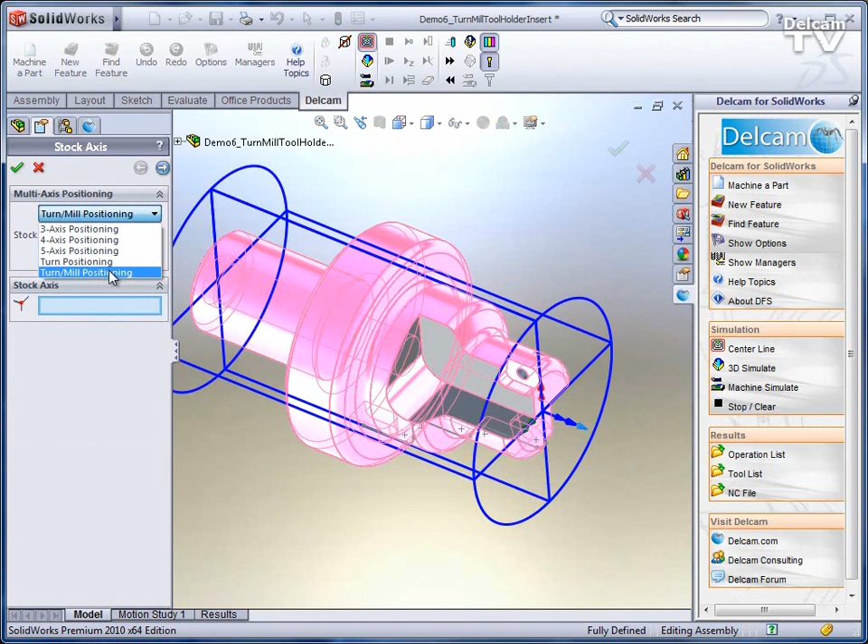And if you look at my stock, you can see that I have a stock axis here on the end of a part, and that my stock is a bounding cylinder. You'll also notice that I have turn mill positioning turned on. Once that is all set up and ready to go, it's really quite easy to program this part.

I'll start with the turning feature, and you can see I already have a sketch down here extracted from the part's original revolved boundary. So I'll go to New Feature. You'll notice that I have a milling and a turning tab. I'll select Turning, Turn or Bore.

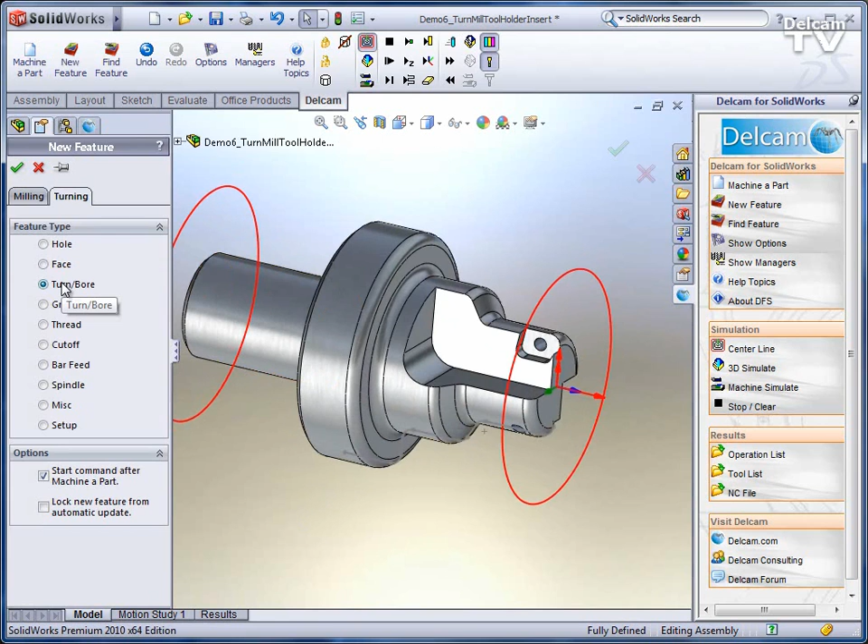And I'll grab that profile right there, and you can see an immediate preview of what that feature is going to look like. If this had grooves that I wanted to machine separately, I could remove the grooves, but that's exactly what I want, so I'll hit OK.

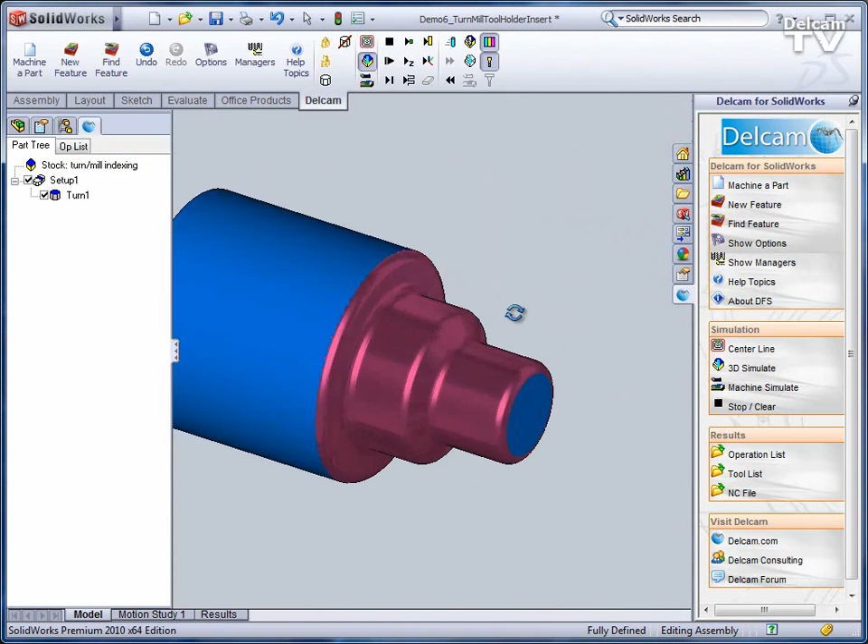Being feature-based, all of my tooling will be selected for me: speeds and feeds, step overs, everything I need to create this toolpath. So there's my original shape and my first turning feature.

Now I want to attack some of these milling features, and it's just a matter of going to New Feature, deciding what type I want. In this case it's milling, and I'll mill this with the side feature, this boundary right here. Instead of selecting a sketch, I'm going to select edges. I can do either one.

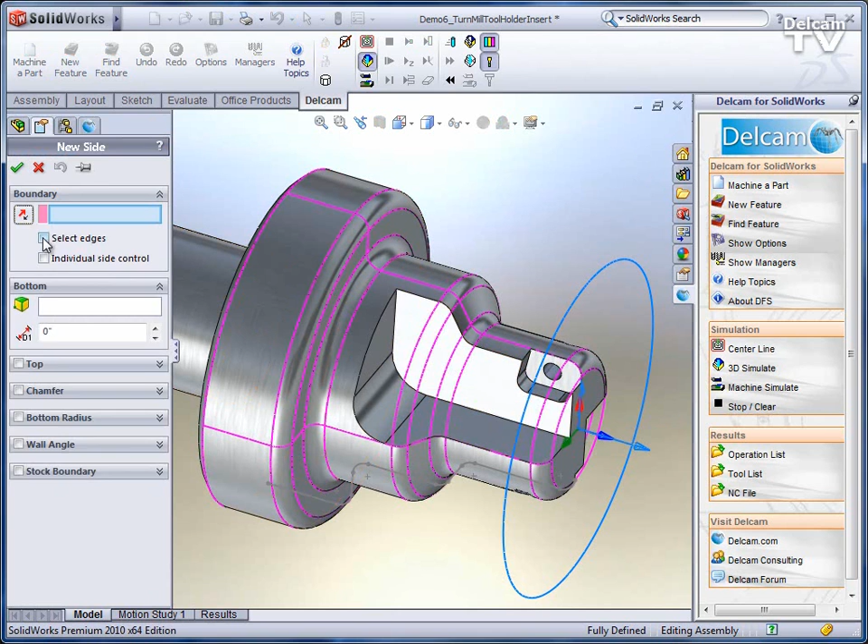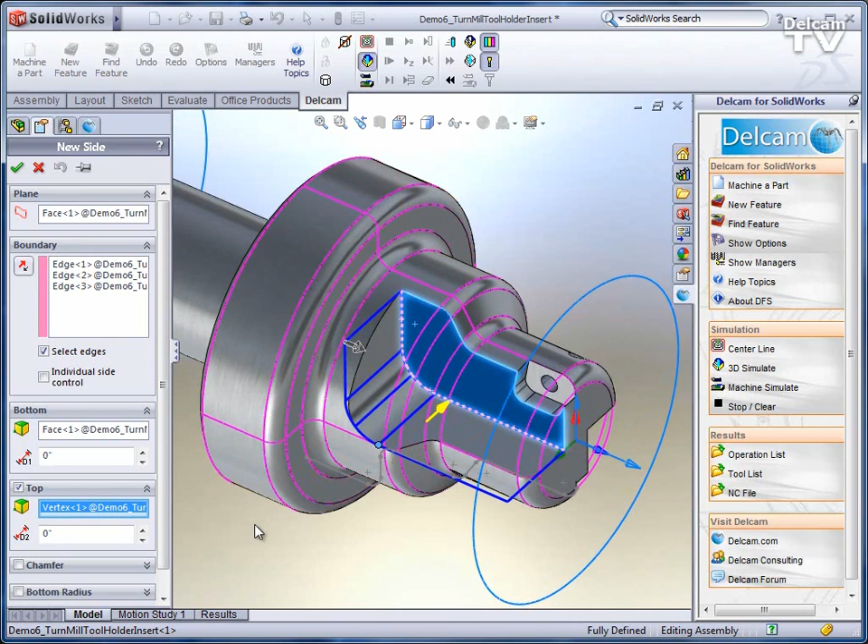I'll select that as my plane, these three edges as my boundary. The bottom will be that face, and the top will be this vertex up here. And you can see that preview ready to go. The yellow arrow, as always, indicates the machining direction, so the tool will be coming from the proper direction. And I hit OK.

And my simulation shows the part machined exactly the way I want it. I didn't have to create another setup for the milling. It just took the geometric information and created the toolpath from the proper direction.

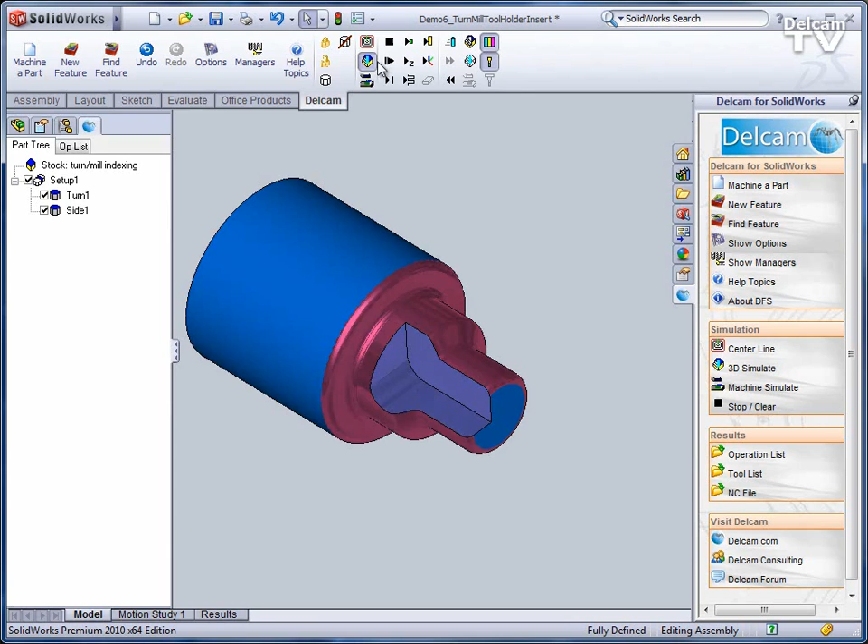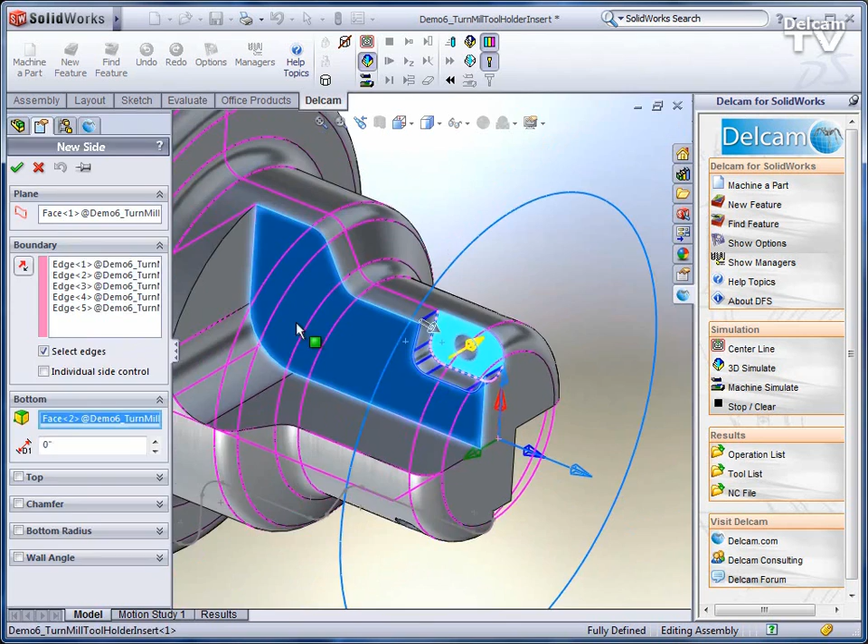I can do one more here. New feature, another side. We'll select edges again to this plane. Select tangency to get the profile, and select the bottom. And I have my toolpath ready to go. And of course my code is done under the results window.

So again, turn milling is quite easy, because once you learn turning, once you learn milling, it's really combined in one package.